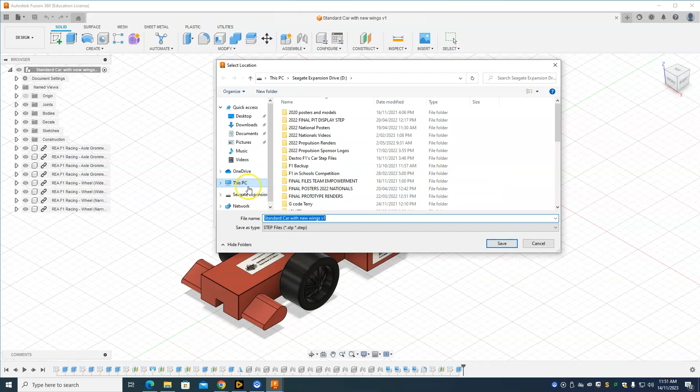You'll need to go to this PC, alright, and then find your home drive, which will be in here. Okay, for me, I'm just going to save it to this hard drive here. So I'm going to go save. All right, and then click export. All right, so that should go through and export. So it'll tell you once that's done.

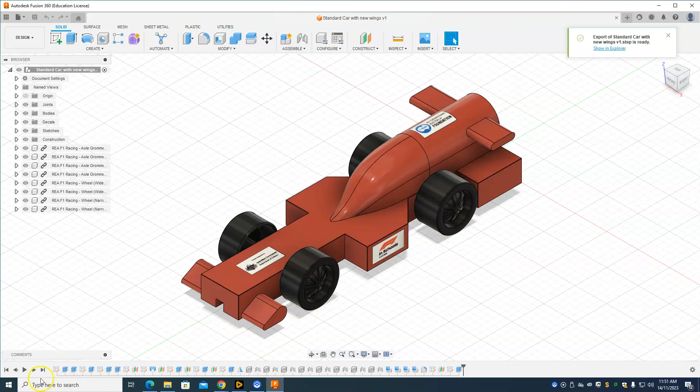Now you're going to have to go into Discovery. So just search for Discovery and you click on this one here. All right, for me, it's already open. So I'll just open it here for me. Now this is the test that I was doing before. So I'll just close this one down. Actually, no, I'll just reopen a new one.

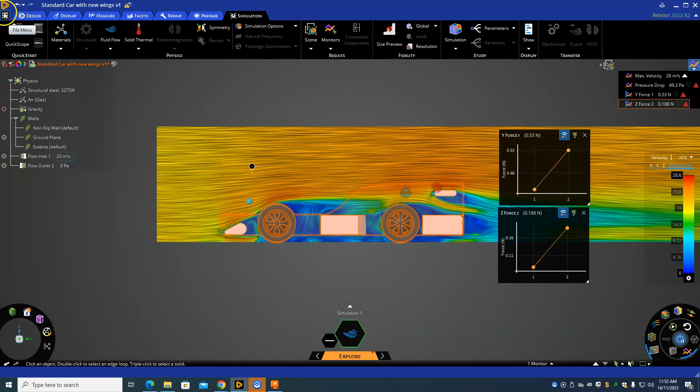So what you'll do is when you come into the program, you'll need to go to Open, Browse, and then find the step file. So for you guys, it'll be in this PC and then go to your home drive. All right, but I've already got my hard drive open. So the standard car with wings, new wings. All right, step file, go Open, and I'll just go No to the previous one.

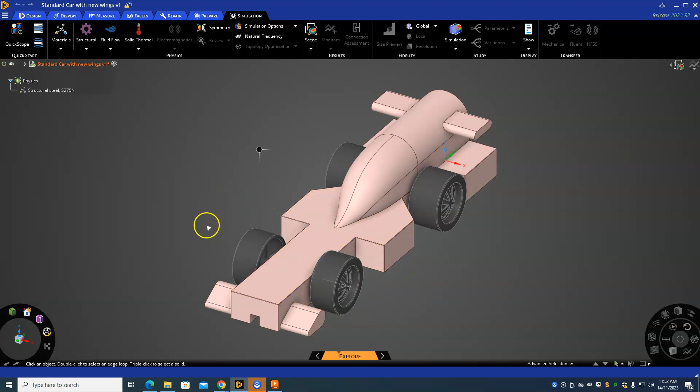Alright, so this is what it will look like when you first start up. Now, to rotate around your model, you can click and hold the scroll on your mouse. Alright, and you can rotate around. You can also click on these little icons, this little cube here. Alright, and that can obviously rotate to wherever you need to be.

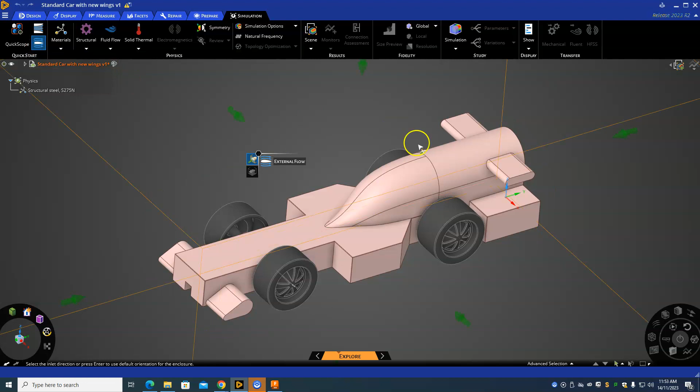Alright, so to start off, what we're going to do is select the external flow. Okay, and then it's going to ask us here to select the inlet direction. So we're going to click on this arrow because that's where the wind's going to come from, the airflow. And now it's asking us to select the ground plane. So we're going to select the bottom and that will set itself up. Okay, so now the bottom should be underneath the wheels there. Okay, awesome.

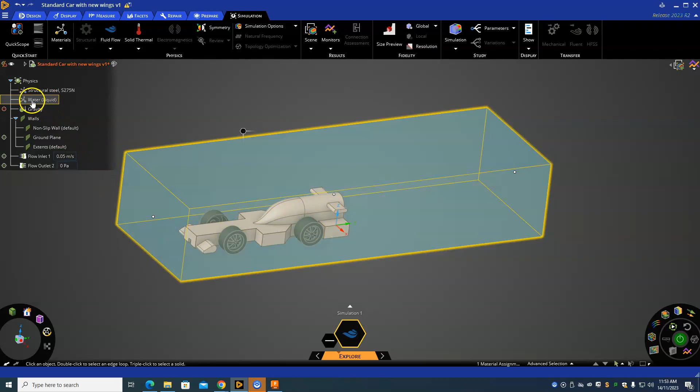All right, now what we have to do from here is change the water. All right, so it's water liquid at the moment. We want to change this so it's air. So we're going to go right click, edit, and we're going to change water to air. All right, that's done. Now the next thing, the flow for the inlet needs to be changed to 20 meters per second.

All right, because your car will go down the track, well, it's a 20-meter track and it'll roughly go within about a second or just over a second. So we'll try and get that as accurate as possible. Okay, so that's done. The next thing we have to do is go over to monitors, select that. All right, and we're going to change the variable to force.

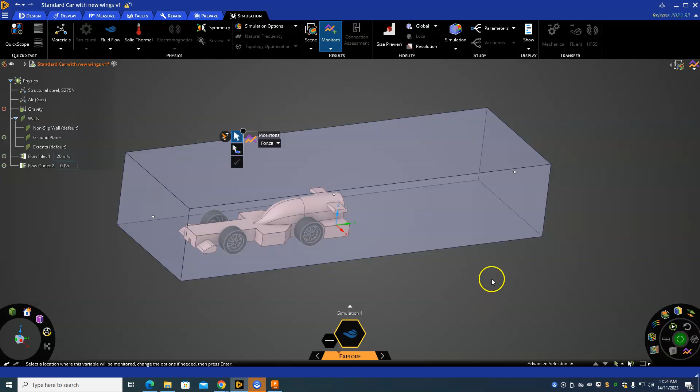Okay, now what we're going to do is we're going to hide the wind tunnel first. So you're going to right click and then go hide. And then we're going to select the whole entire car and then change this one to Y. All right, then select the tick. All right, so now it's measuring our drag force for the Y. The next thing you can do as well, same thing, it's already selected, so we can look at the Z. So this will measure our lift and downforce.

So select that again. All right, so I had to click off of it and redo it. So select all, make sure it's on Z, and then select accept again. So you should have, we'll just redo that one. Might just delete that. All right, so we're going to go select all, change it to Y, and then press accept. So you should have the Z force and the Y force. Okay, so Y is measuring your drag force and Z is measuring your lift and downforce. So you can just cancel out these, we'll look at them later.

All right, so the next thing that we can do is get started with the test. So you're going to go down here to solve and select that, and it will automatically start a virtual sort of wind tunnel for you. Now at the moment it's using vectors. So if I highlight over here, you can change the thickness, the count, all sort of stuff, depending on what you want to get out of your results.

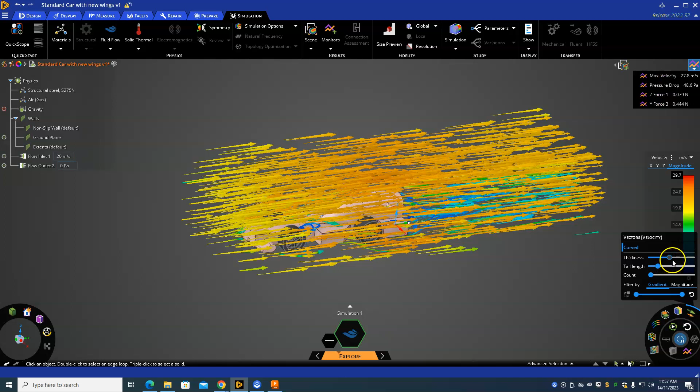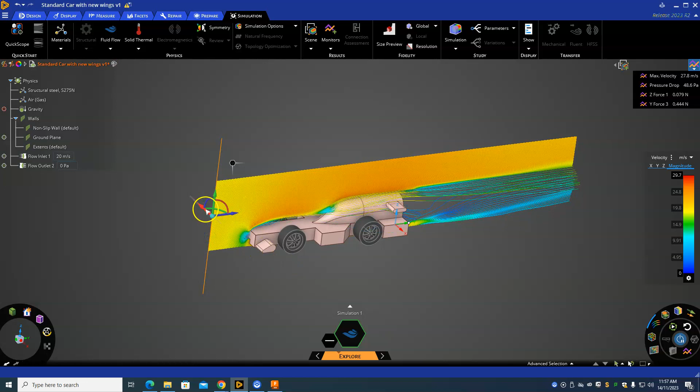Now, if you deselect that, you can go across. I would say streamlines are probably the one that you want to focus on. So select that. Once again, you can change the thickness and the count, but you can also grab the outer circle here and you can reduce that down. So we're looking at it as a plane, and we can grab this red arrow, drag it across, so you can focus on certain parts of your car depending on what you want to test.

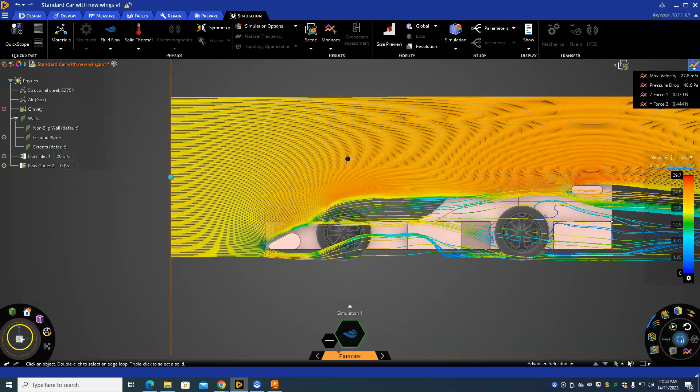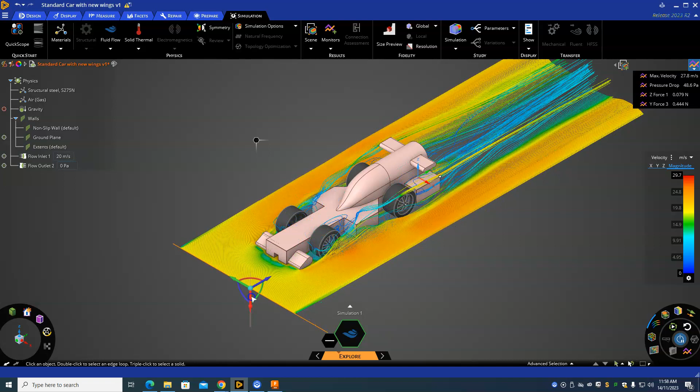All right, so for example, if you want to look at your front wing, we could change the view. And you could do a screenshot here of the front wing just to analyze how the airflow moves around. What you can also do is, I'll just extend that back out. Actually, sorry, I'll keep it like that, but I'll rotate it around this way. So once again, you can grab it and focus on certain areas of your car, and you can get screenshots depending on what you're trying to show.

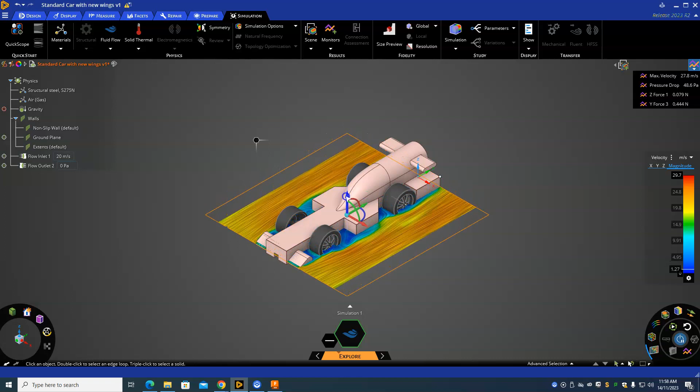All right, we can untick that. You've got particles as well. This one here is probably the one that I think most of you will be interested in. It gives you a lot more detail about how the airflow moves around your car body. So once again, you can move that plane to focus on certain areas. You can rotate it like we did before.

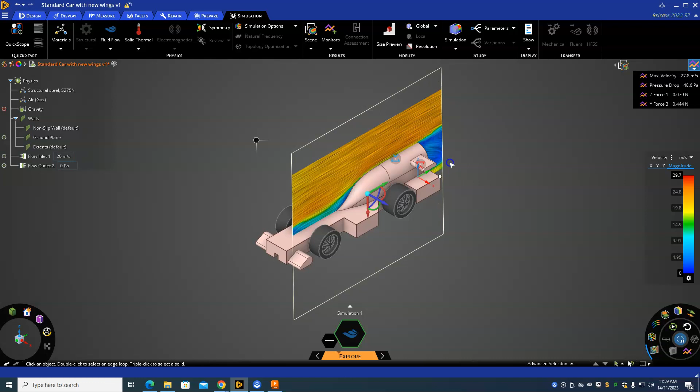Now the one thing that you're probably noticing is that it only has a small sort of work plane that it's working on at the moment. We can extend that out. So if you go down to settings and we go to show minimum and maximum locations, and if you click on that blue dot and then grab the outer square, you can drag that out as long as you need, and then once again you can start moving that around to show the airflow around certain parts.

For your results over here, like I showed you before, the Y force is obviously the drag on your car. So you do want to reduce that as much as you can for all your prototypes that you run. The Z force is your lift and down force. So once again, you want to try and reduce that as well. And you've got your max velocity and your pressure drop as well that you can focus on.

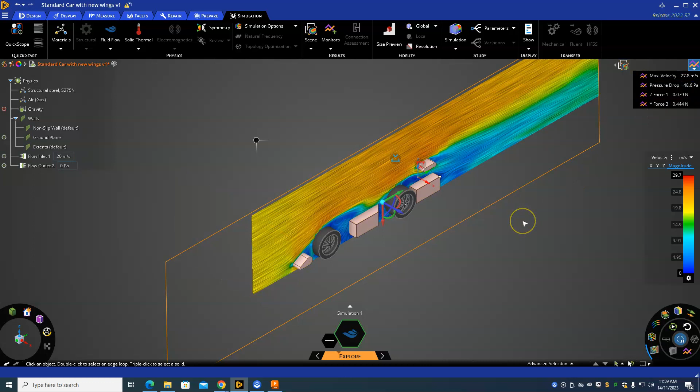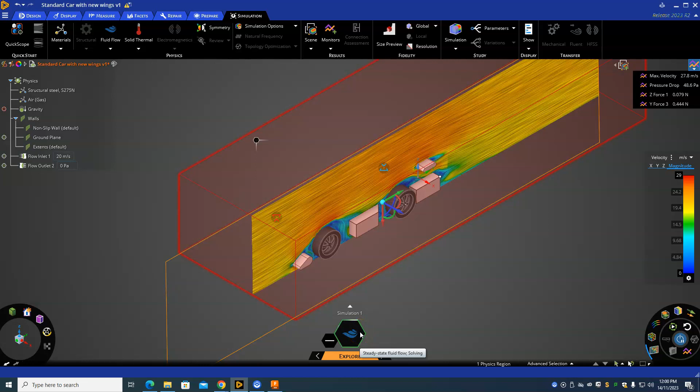What you can do down here is you can change the fidelity. Obviously if you increase that all the way to the top, you're going to get more accurate results. It will take a little bit longer to simulate that test for you. And you can see it happening here as that bar goes across. When I hover over it, it says it's still solving at the moment. So when that comes up as complete, you know that your test is completely done and you can get those screenshots for your results.

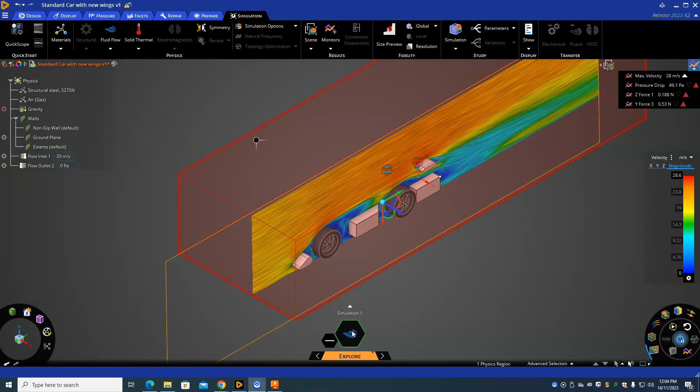So I'll just pause the video for that simulation to complete. Now when I highlight over here, it says complete, so I know that's ready to go now. Like I showed you up here, you've got your results. So if I click on the Y force, it will show me this little graph. That's now complete. So I can then take a screenshot of that, put it into your portfolio, and just show the result that you've got for this test.

Then once again, you can go through, make changes to your car, bring it back into here, test it again, and see if you've improved that. Like I said before, you want to try and reduce the force in newtons as much as you can to get better results, especially for the racing for the F1 Schools competition. Once that's done, you can play around with all of these different settings to try and get perfect screenshots for explaining to the judges what you actually want to achieve with the design that you've got.

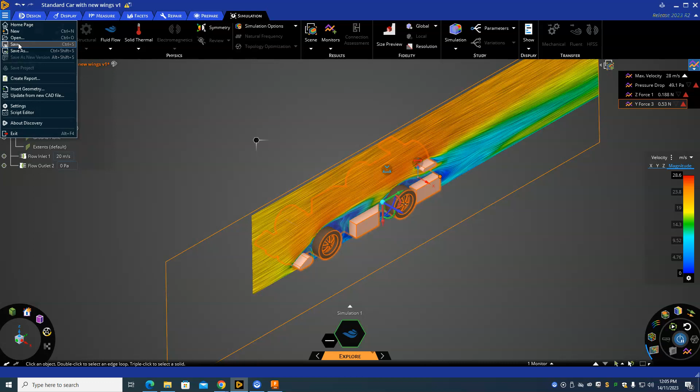But then once you complete, you can go through and save this if you need to. If you don't need to, then you can just close it all down. But if you go over here, we can save that to your home drive. So at least you've got a record of what you've done so far. So if you have to come back to this test, that model is always there ready for you.